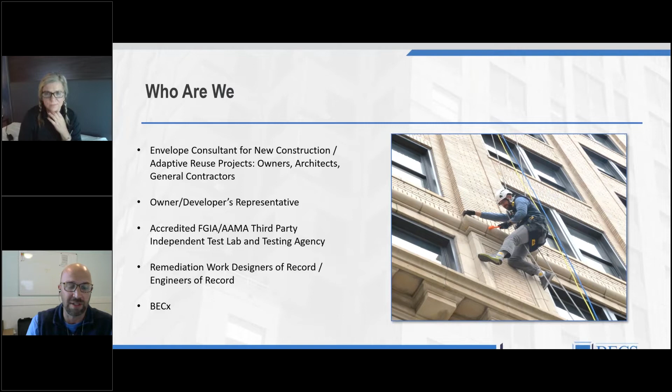So let's just kick off—what's the difference between lab testing and field testing? They're actually very, very similar, so I'll just go through this. The picture on the right there is a typical setup—we're talking more in this conversation about fenestrations and doors, but it's very closely tied to air barriers and cladding too, they're all kind of the same test. On the right there's a typical Lexan wall, and what looks like a patio door. It actually got hit by a hurricane impact missile there, and it's being cycled. Basically, that test wall can do certain tests.

Let me back up a little bit—so the building code, why do we do testing? The building code references the model codes, ICC codes, kind of like consumer reports for VCRs or toys or whatever. For you to come out with a product in the United States, the code defines what you need to do. So the basics of that for fenestration products are...

Operation force, so that people who might not have all the muscles in the world can lift up a sash on a window. Air infiltration, for reasons of comfort and thermal performance. Water performance, for obvious reasons—you don't want water coming into your building. Structural performance, and thermal performance, and some ancillary things like acoustics that aren't necessarily required by code. And if you're in a hurricane region, hurricane resistance, and if you're coming out with products resistant to tornadoes, there's tornado codes as well. So I listed some test methods here that cover the basics.

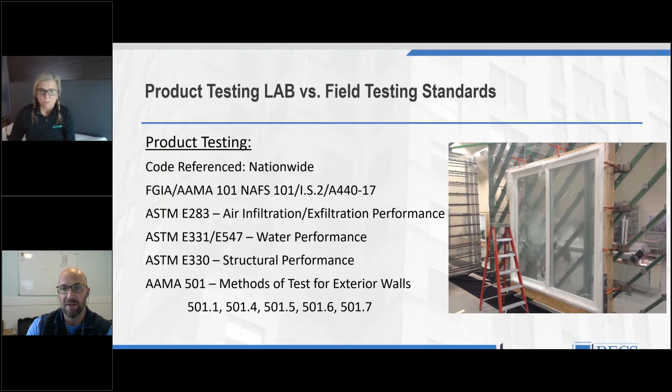So obviously there are elements of your building enclosure that you need to validate, and then how it all comes together as a system, right? So it's important to understand the differences between the two.

So then what's field testing? The basics of field testing is quality control typically for a new construction project, and typically it's not required. We got maybe one state reference requiring field testing in the country, but besides that, it's really just quality control for new construction, because developers, general contractors and architects want to mitigate their risk for rework - they don't want their buildings to leak.

But the essence behind this is that the tests done in the field are the exact same tests done in the lab. There's some nuances to that, but in essence that's what it is. The reason for that is because we can't test things in the field differently than how manufacturers tested when they came out with their products - because if they failed, or if we think certain products pass, we don't know if they're performing properly. So I'm going to go through that.

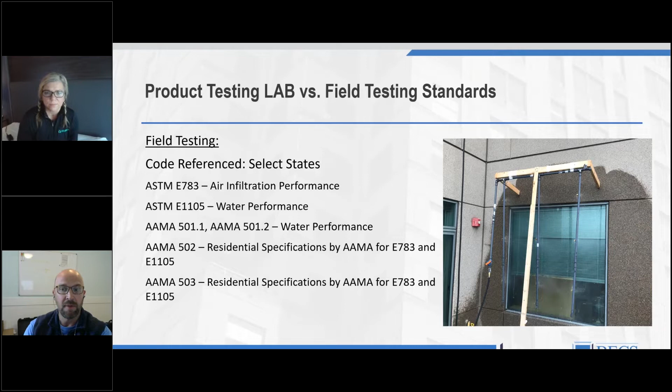Thanks for pointing that out. It's definitely something that needs to be explained, because the test method doesn't give you a criteria, where your specification is going to give you that criteria. So if somebody just lists a test method, what are they testing to, and what's considered good results?

That's difficult - we could just talk about that for 30 minutes. But in essence, there's a default, so AAMA will have a default that says this is what we suggest you test to in the field. And then there's always a loophole, or maybe it's a high performance building and the architect is trying to strive for high performance, and they might have performance above and beyond that. There's no laws, but there's defaults, and there's above and beyond that as well.

So I'm going to go through some of the specifics of lab testing and field testing. Here's a slide that's a water test in the lab. So basically, what's a water test? Typically it depends on if it's a residential window, a commercial curtain wall, or a skylight. Typically the water tests are between 15 minutes and 24 minutes, depending on what the product is.

While you're spraying water, there's a simultaneous pressure differential which simulates wind load, and that pressure is typically 15 to 20% of the structural design pressure. I'll go over that a little later. But in this photo here, you see a window that's clamped to a clear wall - that's because between that window and that wall there's a pressure differential, a vacuum on the back of it sucking air, and that's simulating the wind load.

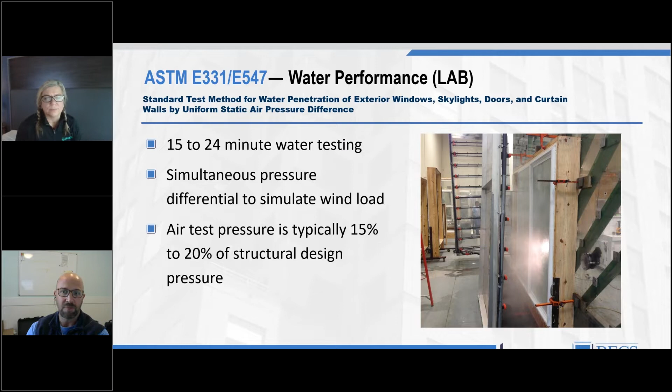I've been through a few hurricanes, and you can really see the fluctuations in air pressure when a hurricane's going by, and that really realizes the pressure differential inside the building - that's what this is simulating. So really, just a fun fact, that water test is 8 inches of rain in 15 minutes.

So people are talking about in Florida right now, we're going to get 24 inches of rain. Really, 8 inches of rain in 15 minutes is a ton, but it's just a standardized method so manufacturers can have a baseline to figure out how their products are going to perform.

So really the next bread and butter test at the lab is air infiltration. I have a whole bunch of numbers on the screen, but I'm trying to just compare. Really this is either infiltration or exfiltration. In the United States, we're really concerned about infiltration. In Canada, there's some exfiltration criteria.

But if you have a residential window, you're around 0.3 cubic feet per minute per square foot of that product - air flowing through that product. That's kind of the code minimum, so you have to be less than that to have your product be sold in the United States. And that's typical for residential products.

There's some nuances there, and then we get into commercial products like aluminum windows, in hotels, or curtain wall and storefront. Then you get down to 0.06 and 0.1 CFM per square foot. In air barriers, you can get all the way down to 0.04 CFM per square foot. Then we jump up to entrance doors, say side hinge doors, you jump way up to a whole 1 CFM per square foot.

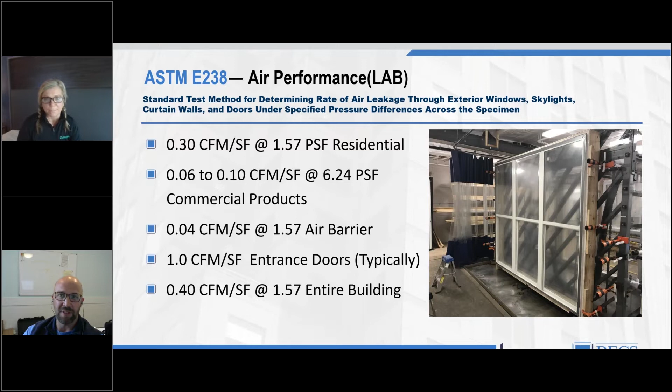And here's just a structural. It's important because pretty much all those other tests are based on the design performance, and the defined roots of structural performance is in the ASCE 7, which is the manual for structures and designing structures in the building code.

So how we do that - it can be engineered by an engineer using computer software, but everything pretty much needs to be physically tested, just because the nuances and the connections in windows and even walls are - you can try to engineer them, but there's so many nuances that the code says you have to test this just to make sure.

And so testing is kind of that same air pressure we use during a water test and during an air test, where it's just much higher. Typically the loading for that is between 10 seconds all the way up to 60 seconds, and some skylights do that differently. And that's in different regions of the country, depending on what you're doing.

And testing does involve the safety factor, so you have design loads and certain criteria for that. And you have the safety factor, which is a certain multiple above and beyond what you're designing that structure for - sometimes that's 1.5 times, sometimes that's 2 times. And typically at that safety factor, there's some common sense criteria where there can't be any permanent damage to the window, or any significant permanent deformation or glass breakage.

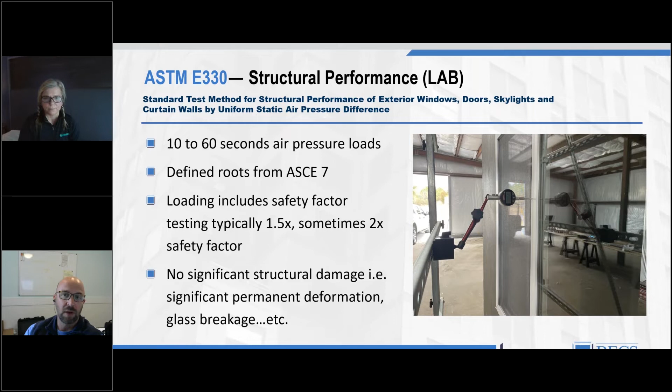So then we get into the reference before AAMA 501 - what is that? A lot of people in the industry, as soon as they hear 501, think 501.2. But 501 is not 501.2. 501 is called out in Florida, and it's really a twin span, 2-story mock-up where that association, FGIA AAMA, came up with this method of test - a protocol, a gambit of testing that includes air, water, structural.

But it goes the extra mile. It really wants to figure out if in a 2-story condition there's lots of thermal expansion and contraction, and really wants to figure out that the whole system, when you get to multiple stories, everything works together. So you could have simple mock-ups and very complex mock-ups - and I don't like to talk about price, but these could range from $10,000 to $500,000 mock-ups, very intense mock-ups, typically done for high rises, custom curtain wall systems, but they can also be done just to solve transitions between brick and metal panel and glass and whatnot.

Typically the tests are listed here, but the main component is this interstory displacement and thermal cycling, to see if you have the same air and water performance before and after interstory displacement, or before and after thermal cycling. And I love that, because it's demonstrating the effect of the testing on your system. You get a baseline, you put it through the thermal cycling or interstory displacement, test it again for air and water - is there anything different? The valuable lessons we're learning from that are huge, to then put that in your mind as you go to the building, where this is going to happen over and over again on the entire structure.

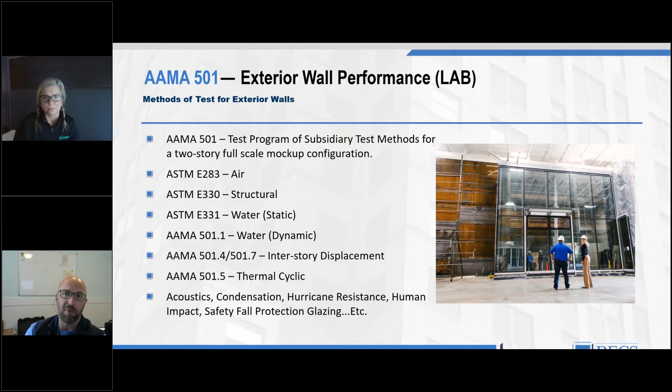So then we'll talk about mock-ups. Everyone's very used to aesthetic mock-ups - we call them parking lot mock-ups or standalone mock-ups, really just to see if the owner or the architect likes the finishes on the outside of the building. More and more commonly, they're converting these aesthetic mock-ups into performance mock-ups on site, which are super valuable, and really solving constructability problems and sequencing problems.

If there is a problem with air infiltration or water penetration, you can include all the assemblies to really get a good idea of - if you do have a whole building air test at the end of your job - what's the air leakage of the whole building, kind of in a smaller scale. And some tests we can do in the field, and some tests we can do in the lab. It's really hard to do an acoustic test in the field, or a condensation evaluation in the field, so really these are limited to kind of air and water tests typically in the field.

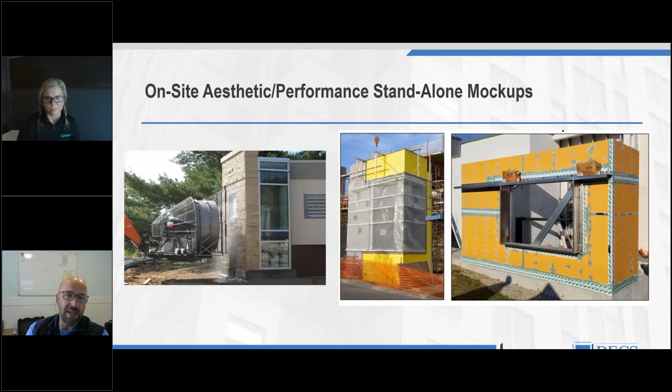So that's why we tend to do things in the lab - when we do things in the lab, we do them to more of an extreme situation, like that 8 inches of water, or the 1.5 to 2 times the safety factor, because we're trying to do everything we can in a lab to a higher level, knowing that we can't cover everything you would see in the field. So we're going way above and beyond to get that understanding.

So back in the previous slide where we mentioned AAMA 501, there's a gambit of different test methods - 501.1, 0.2, 0.3, 0.5, 0.7, and so on. 501.1 is done both in the lab and the field, typically using an airboat engine or some sort of portable machine. This is ours, and this was a recent project a couple weeks ago at UNC Surgical Tower. Really you're creating the wind while you're spraying water, and it's a fantastic test, still associated with that 15 to 20% of the structural capacity of how that product is defined. And I get this question all the time - what's worse?

We're going to go over ASTM E1105, and this test. So what's worse, a chamber test, as it's known, or a static water test, or dynamic water test. And really, they're supposed to be, in theory, the exact same.

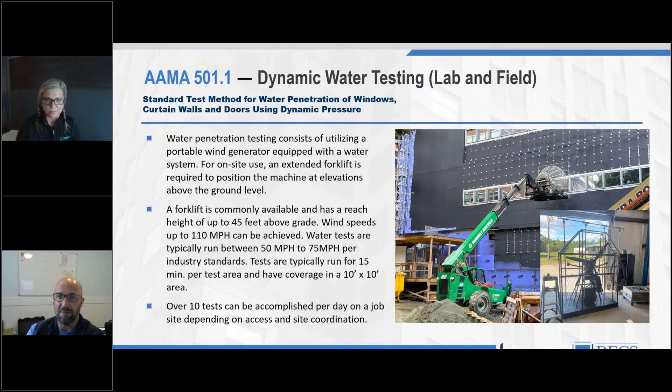So then back to the famous 501.2, it's really what we call a handheld water nozzle test. In my opinion, this is really used for forensics. It's commonly used for a glazing contractor, because it's quick and easy. The equipment's easy, it's just a hose and a nozzle to go over the lineals of a commercial product.

They check their work before maybe they don't have a third-party testing agency, because the project doesn't have the funds to hire someone like myself or another company to come out, so the glazing contractor does this by themselves, and it's good in that area. The problem is that it's not in that gambit of testing by a manufacturer. I'm sure the manufacturers test it anyways, but when you have a submittal for a commercial product, this is typically not listed on those products, so you can kind of get that nuance, but it's used all the time.

And I like how you suggested, a lot of times they do that. Our glazers want to verify their installations, right? So they'll pick an area and they'll be able to go back and just see how things are going. If there's a questionable spot or area or installation concern they have, they can go ahead and do this.

Yeah, and a lot of these can be run incorrectly too. This is supposed to be a foot away. It's supposed to be perpendicular. You're supposed to always be moving at one foot per minute kind of rate, back and forth. So if you're 3 inches from the curtain wall, and you're really pounding it in at an angle, then you could make something leak, and that's always something to think about.

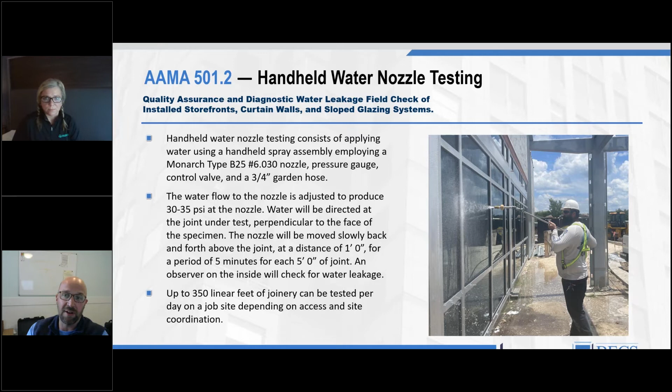Here's just a cool photo of us on ropes. It is easy to kind of access and get to hard to reach places there.

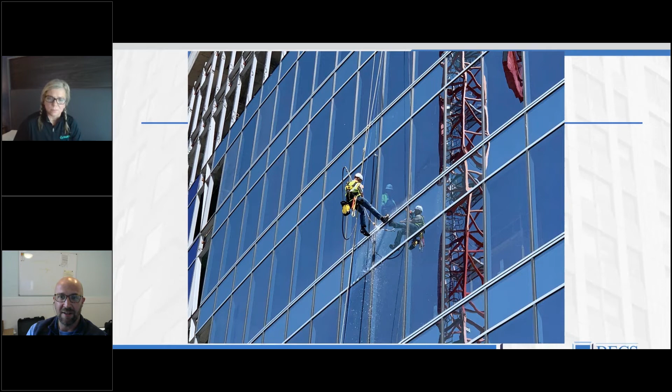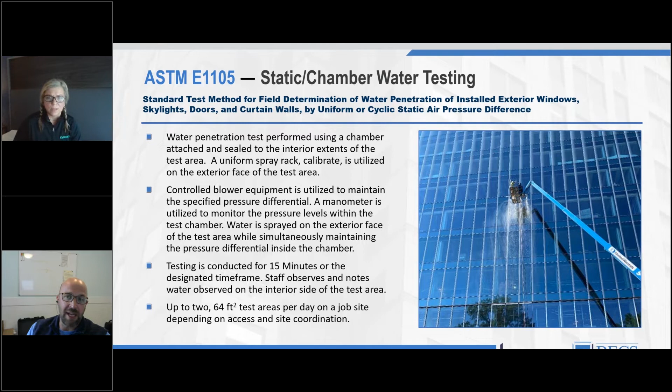So then we get to the other more common test that's done in the field, ASTM E1105. And I mentioned before, AAMA 502 and 503, E1105 is inside of those specifications. Basically, this is the exact same test as ASTM E331 and E547. Basically, it's a spray rack on the outside with a chamber on the inside with a pressure differential simulating wind load. These are a little more complicated compared to that wind generating test, because you have to build a chamber on the inside.

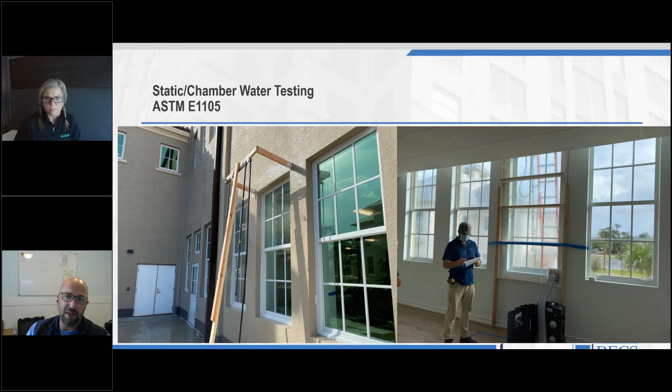I think I have some photos here. So here's kind of a smaller residential setup, and here's just a small chamber on the back side of the wall with your equipment. And here's just another situation where you're basically pulling a pressure differential at a certain pressure.

There are some nuances where people always talk about a reduction. AAMA calls out as a default a reduction in test pressure, and that's not the water pressure, that's the air pressure that's going through the system while you're doing this test. It's a 1/3 reduction of typically what's done in the lab, that's kind of the rule of thumb. And again, a project specification can either allow that or not allow that.

In my opinion, being an accredited lab, I think it's a great thing to do because really in a lab, all conditions are perfect. You have your best crews and the whole company come out and do these mock-ups, and they're perfectly level, perfectly plumb, perfectly square. You could try a few times to get it to pass, and then it finally passes. You're great, write the test report.

Where in the field, especially if you have mulled assemblies from the factory, they go in a big truck and they get wrapped and whatnot. They're not going to have the same performance as they had when they tested in the lab. So that's really why there's a reduction there, and there's kind of a big debate in the industry about that. But that's kind of what that is.

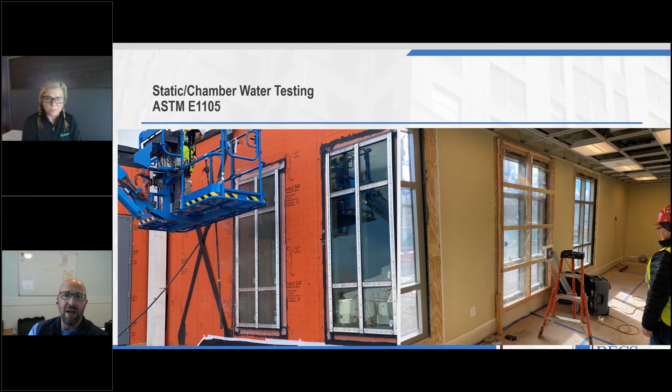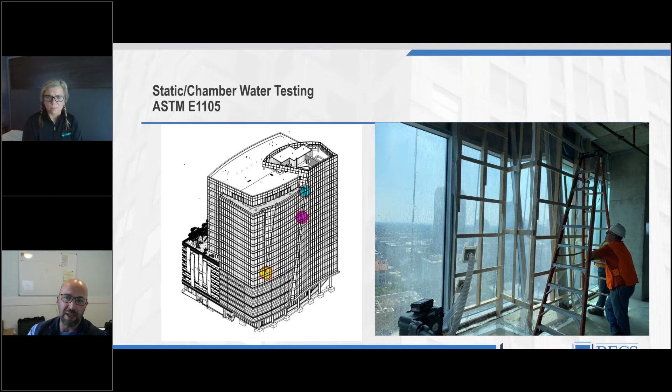Here's just a cool example. Typically, when you have a big commercial project, you just test very critical areas. Then we kind of have this sloped inside corner here where we have some critical three-way conditions here and down here, and some areas can be really hard to access. You can really build chambers that accommodate anything, and typically use a clear plastic with some framing to pull that off.

But you can also do walk-in chambers. So this is on a construction site. It's a 2-story chamber, so really there's another chamber on the floor below, and they're connected, and you can witness the test inside, so you're not looking through plastic. It's just another option to kind of get more hands-on there.

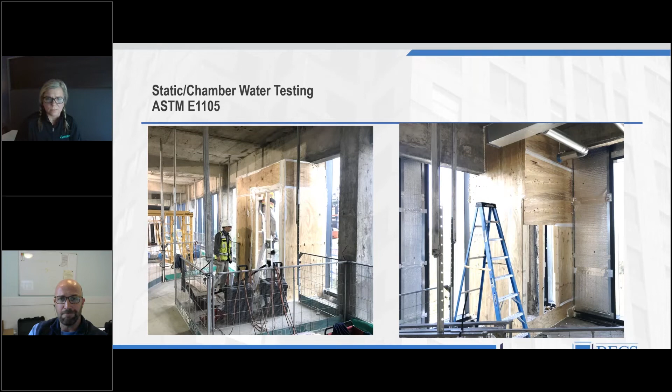And I love how this really demonstrates the versatility of this test, because I think a lot of times people think it can't be done on a high rise, or it can't be done like you showed with it being able to walk in. So I love that you're sharing that versatility of this test, that it can be done in those different conditions.

Yeah, and really, so one thing to bring up is all these test methods here. It's kind of the title from the test method. It always says windows and doors. But really, this is done on cladding, on metal insulated panels, on air barriers, on transitions and whatnot. And really when you kind of go back to the building code, there's kind of exceptions to the rule for building performance, and where water's supposed to be kind of flashed and drained out, and with a wind load.

So back to the air infiltration in the lab, the exact same test is done in the field. Again, there's some nuances of criteria that are a little less stringent in the field, but essentially you're pulling a pressure and measuring airflow. You utilize what's called a tare bag, which is just plastic sheeting, to make sure that you're only measuring airflow through what you want to know. This is kind of different than the water test.

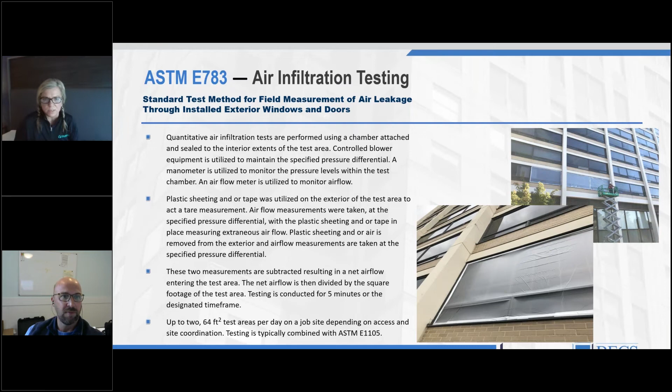And you mentioned at the bottom there, it's typically combined with 1105. Do you get where somebody just wants to understand the air infiltration?

That's why it makes sense to typically do the air test and the water test at the same time.

So we can talk about air infiltration. I think we talked about it yesterday - I can talk about air infiltration for a long time.

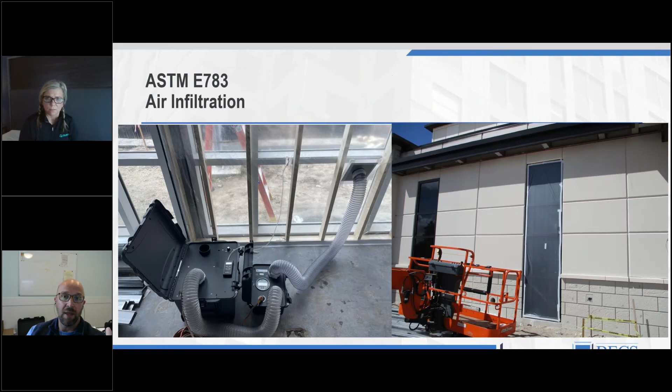There are certain situations in the field where you can have a false positive result when doing air testing, typically when you have ribbon windows or continuous curtain wall or storefront windows that are continuous, and you can't compartmentalize what you're testing - that's the word in the industry. If it's not a punched opening, if it's something continuous, typically you shouldn't do E783, because the result will come out fantastic. It'll say you don't have any air leakage, when in fact you might possibly have it.

In those scenarios, you should really do a smoke test. We're using the same chamber, same pressure differential, and visually looking for air leakage.

There's some question about this - if you do get some smoke in, there is an allowable amount of air leakage, so you really have to discern how much smoke is too much. A small amount might be okay, a large amount is a cause for concern. But it's tough - I've been in situations where I've had a lot of smoke and raised the red flag, and everyone else said it was okay.

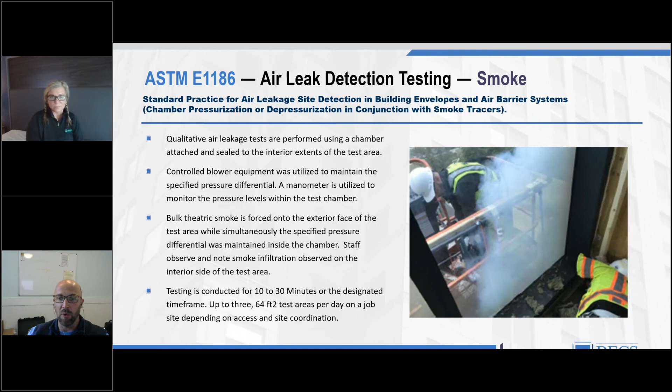I'm like, okay, because if you have too much air infiltration, you might have condensation - that's really the main concern. You'll have discomfort, and air infiltration causes lack of thermal efficiency through convection, but also condensation, which causes problems like corrosion and mold in walls. So air infiltration is pretty important.

With whole building air testing, it depends - you can do it at different stages throughout construction. You don't have to do it when it's done. Do you want to do it a couple different times? How would you recommend? So, I mentioned the mock-up before, like a standalone mock-up.

If you can build a chamber that incorporates slab conditions, inside corner conditions, outside corner conditions, and also the wall to roof conditions - if you include all that and build a chamber to encapsulate it, not just test it... A lot of people build these mock-ups for aesthetic reasons, or think they're building for performance reasons, then only test the window, and that's a big miss for the project. You should really test everything and get a good picture, and if you do that, you can get a great idea of air performance in the whole building.

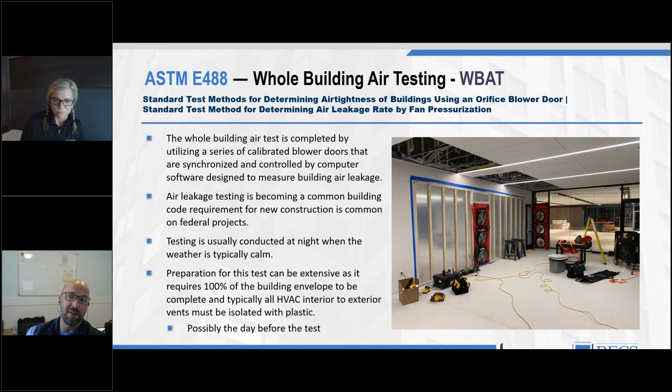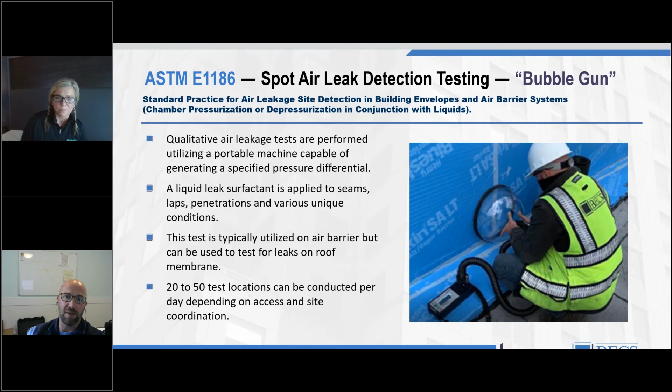And then here's this, probably could have been earlier, but just another air spot leak check on air barriers and whatnot, just kind of looking for air leaks there as part of the quality control system.

We use this when we do adaptive reuse, on some of these old mill buildings that need to be repointed, and we can do a before and after. It's a good point to make that there's a whole bunch of other tests we haven't talked about that can be quality control tests, like infrared, electronic leak detection, and whatnot. We're really just talking about fenestrations in this presentation.

I like that you shared that, because it really helps us conclude what we're talking about today. You talked about a lot of different tests, and we could have talked about each one for an hour or more. There are a lot of other test methods that might be more representative to whatever it is you're looking at, so what we tried to handle today was more of a broad look at some of those lab tests versus field tests, and how they compare.